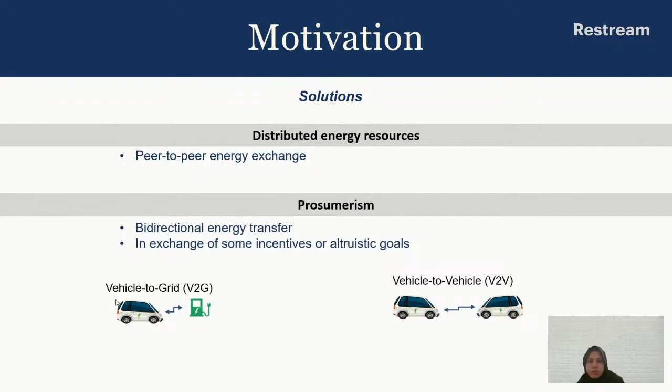In this work, and overall for utilizing prosumerism, we have many objectives. The first one is grid load reduction. So when electric vehicles help in energy supply, the electricity generation load on the main grid will reduce, and ultimately it will lead to cost reduction, because the grid has to pay some cost for electricity production.

And then we also aim to increase the utility of electric vehicles themselves, because they can buy energy during off-peak at cheaper prices, and they can buy energy from another electric vehicle, and maybe they have to travel less towards another electric vehicle rather than to a charging station. And then we achieve prosumerism.

That's being cooperative in the society, and by selling energy, prosumerism does not only lead to monetary profit, but also has some altruistic goals as well. Because when we sell energy, we will think that we are somehow contributing towards the environment, we are selling clean energy, and we are helping the community. And obviously environmental considerations are one of the objectives.

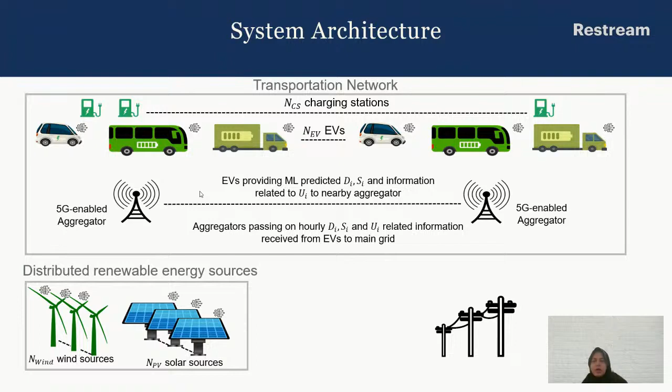And this transportation network is powered by distributed renewable energy resources. We have considered the wind resource and the solar resource. But obviously, this power is not enough to power the whole transportation network when we have a large number of electric vehicles. So the rest of the power is supplied by the main grid.

And we have some machine learning models incorporated in electric vehicles. They predict the demand and supply of vehicles. When a vehicle starts its journey, depending upon the route, it predicts how much energy will be consumed in its journey, and depending upon the energy consumed and the current state of charge, they decide whether they will need some energy on their way and where they will be stopping for charging.

Maybe they don't need any energy, they have enough in their battery, and they can complete their journey and still have some left, so they can sell their energy to electric vehicles. So all this information, whatever they predict, they send to 5G aggregators.

Here we are talking about a transportation network that is powered by 5G communications, and the vehicles can talk to the aggregator, and the aggregator then sends the information to the main grid. So basically, the aggregators send hourly predictions of demand and supply from the electric vehicles that it is anticipating, and the hourly prediction of supply from wind sources and solar sources is also sent to the main grid.

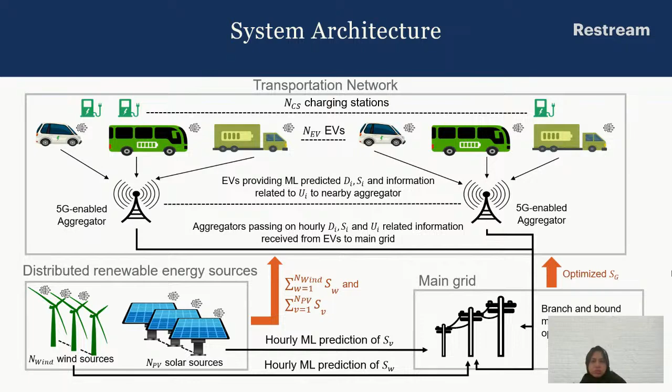Then the grid decides how much energy it needs to provide to the transportation network, depending upon how much it's getting from the distributed sources, and what's the demand and supply from electric vehicles. So it optimizes its cost. It tries to minimize its cost and optimize the supply. Here, we will see how the problem is formulated in the upcoming slides.

So first, we predicted the output from wind and solar resources. We have different data sets for wind and solar energy sources. Mainly, the parameters for predicting are weather related, like time of the day. Is it morning or afternoon or night? And day, maybe it's a winter month or a summer month. And then the other parameters like wind speed, wind direction, and precipitation, solar radiation, etc.

We used some machine learning models for prediction. They are open source models. Mainly, they are regression models like CatBoost, and then gradient boost, light gradient boost, and hybrid LSTM, that is long short-term memory and convolutional neural network. In the results section, I'll show how the performance of these models varies according to the training time and the accuracy.

For predicting energy demand and supply, we have used the same machine learning models, but before that, we performed some mathematics to see how much energy is consumed. So, depending upon the speed of the electric vehicle, its traction force is calculated. It depends on the speed, acceleration, the mass of the vehicle, and its frontal area. These parameters calculate the force that is required for moving the vehicle, and then what will be the energy consumed.

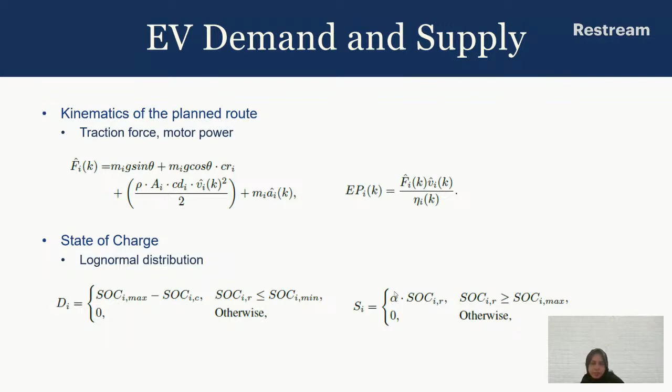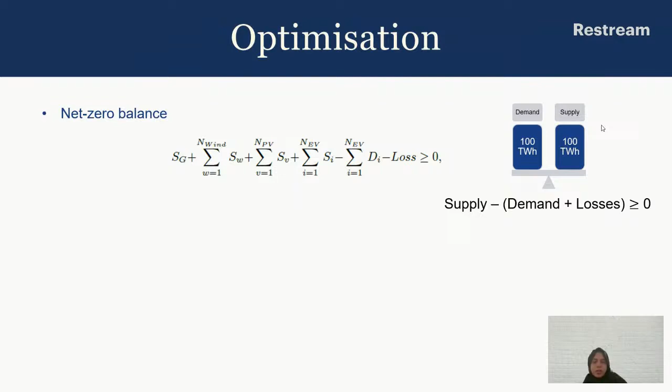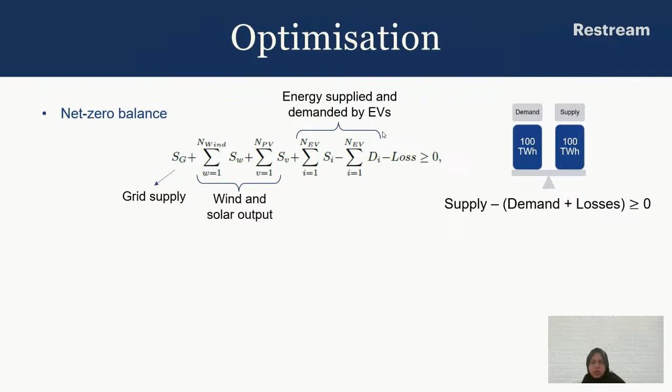Then we perform optimization. The main goal of our optimization is to achieve the net zero balance. Here, net zero balance means that we should have enough supply that caters to the demand of the transportation network, and the supply is coming from the grid and wind and solar sources, and some of it is coming from electric vehicles who are willing to give their energy, and the demand is coming from the electric vehicles. Based on that, we formulated a problem and then solved it using the mixed integer linear programming branch and bound method.

And in the problem, we aim to minimize the grid cost by optimizing the supply from the grid and the supply from electric vehicles. Like, it takes supply from electric vehicles and produces some of its own so as to achieve the minimum overall cost. Then we have some constraints, like there is an upper limit on how much a grid can produce, and if it is buying from electric vehicles, then we have to make sure that the electric vehicles' utility is greater than zero, so in the end it's earning some profit.

And also, last but not the least, the main concern is to achieve the demand supply balance in the transportation network. And we solved it using the branch and bound method.

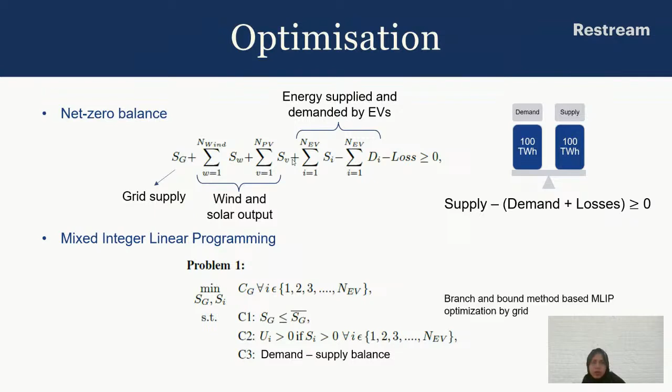Talking about the cost, I would like to first present the incentive distribution system that we have formulated for electric vehicles. So, when an electric vehicle is supplying some energy, and the grid is also supplying energy, the grid has to spend some cost in producing the energy that it's producing itself, and if it is producing from fossil fuels or maybe from any other resources, there's some amount of carbon dioxide that is emitted.

In fossil fuel, the amount is greater, but in other resources like solar energy and wind energy, there's a smaller amount that is being emitted. So, whatever amount is being emitted, depending upon its mass, it has to pay a penalty charge to regulation authorities. Then, if it is buying energy from electric vehicles, it will pay some price to the electric vehicles proportional to the supply that is being provided.

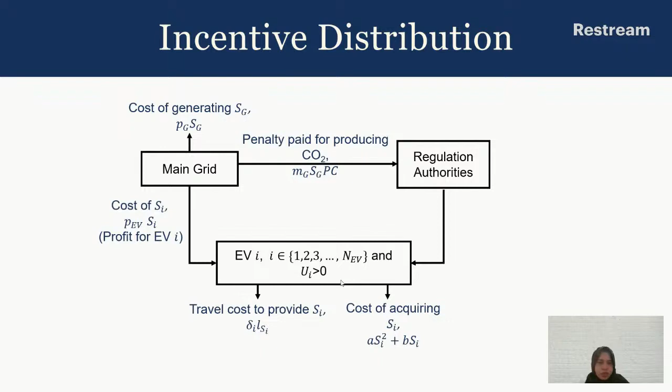Also, when it comes to electric vehicles, it earns some profit from the main grid and some profit from the regulation authorities. So we have proposed that regulation authorities should also give some profit to electric vehicles so as to encourage prosumerism. But also it had to pay some cost while acquiring the energy that it's giving away, and when it's moving towards a buyer or towards a grid or a charging station, it will be spending some energy, so there's the travel cost associated with the electric vehicles.

So that was our proposed system and incentive distribution. Now let's see the results. These are the results of the AI models that I discussed, that we used AI models to predict the solar output, the wind output, and the energy consumption from electric vehicles. So we compared four models: CatBoost, XGBoost, LGBM, which are available open source in Python, and the hybrid convolutional neural network and LSTM. Like it's the combination of regressive and neural network models.

So we see that in terms of training time, the CatBoost is giving the lowest training time, and the lowest training time is lowest computation. So when the computations are low, obviously it's energy efficient. Secondly, when we talk about its accuracy or the final test error it's giving, it's also low, or sometimes even if it's not low, it's at par with the lowest. Like it's quite considerable. So we used CatBoost in the rest of our results.

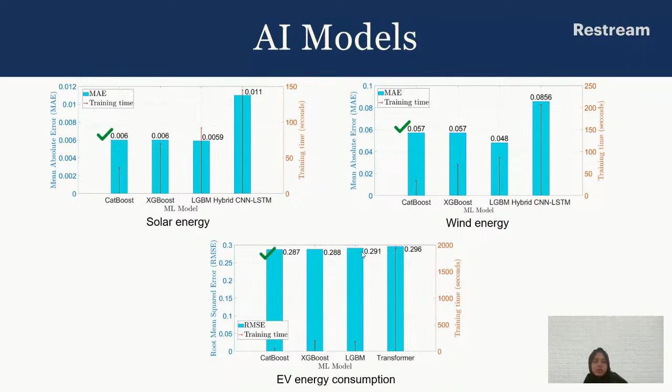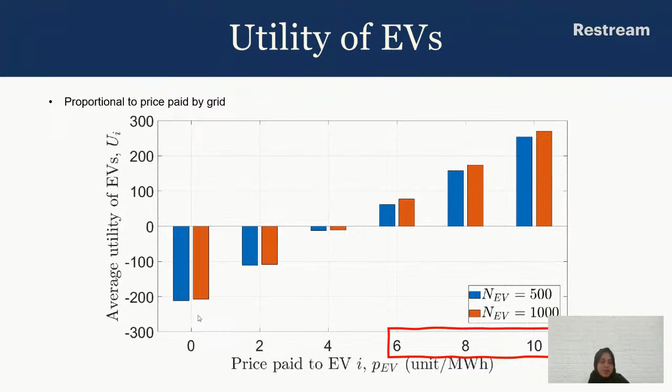Here, you see the utility of electric vehicles. So it depends upon the price that a grid is paying to electric vehicles for providing energy, and definitely the higher the price, the higher the utility will be. For some of the price, we see that the utility is either zero or negative, and in that case, the electric vehicle will opt not to share its energy if it's suffering from loss. So, depending upon the utility, we get the average number of sellers that are here to provide the energy.

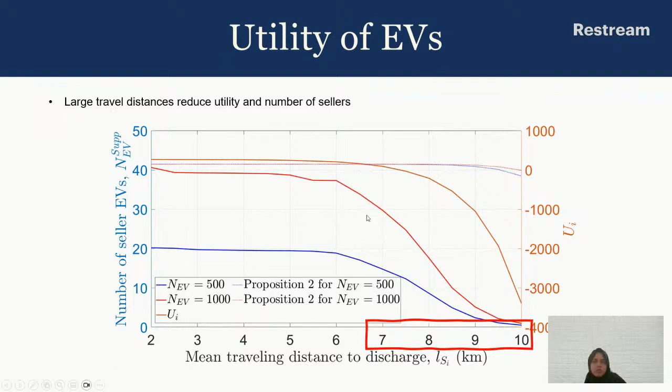And the utility does not only depend upon the price paid by grid, but also the traveling distance that it has to make to reach the buyer. So if the traveling distance is high, you see there's a drop in the utility, and this drop in utility will ultimately lead to the drop in number of suppliers.

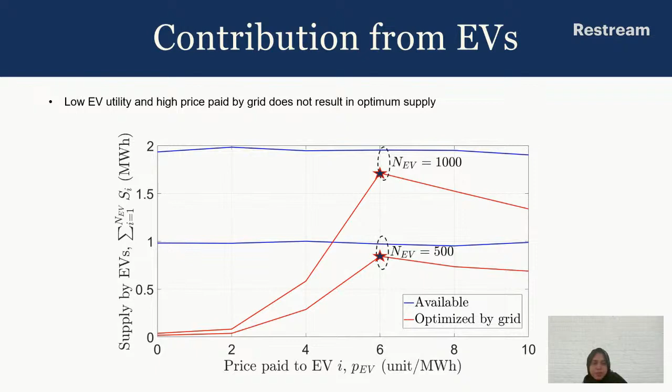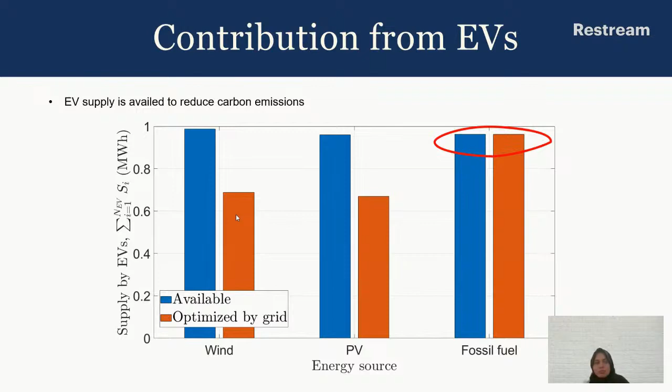Again, if we look from the perspective of the source of energy, we see that a grid tends to avail more from electric vehicles when it is producing from fossil fuels. This is because the grid has to pay some penalty charge for producing carbon emissions. So instead of paying a high penalty, it will try to avail the energy from electric vehicles.

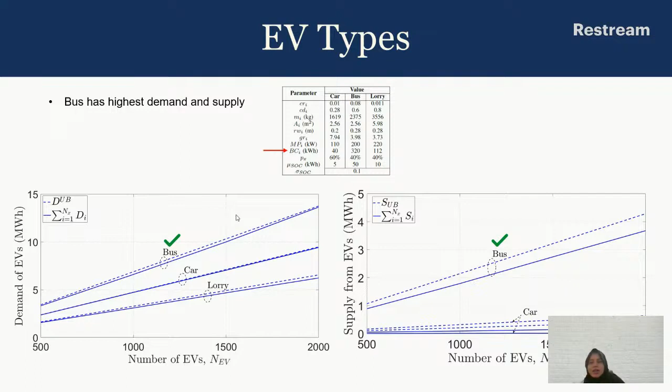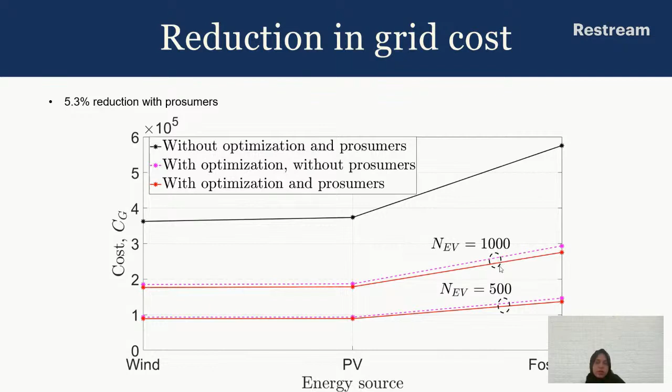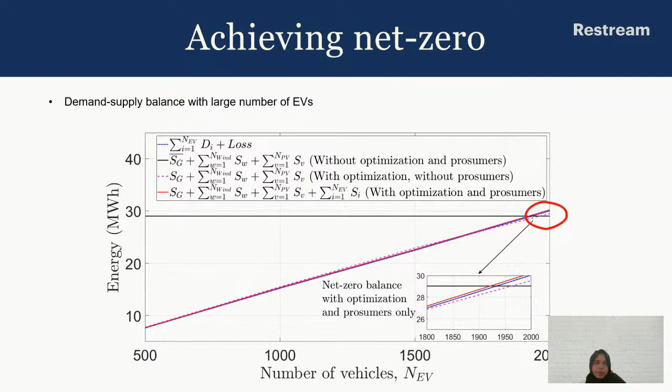However, if we are talking about optimization without prosumerism, there will be a time when the supply will not reach the demand, when the demand will be very high with very large number of electric vehicles. So that's why, to have the balance, we must need some help from the EVs. So yes, that's our result. That was our last result.

Now, I would like to conclude my presentation. Here, we have presented a smart energy management system orchestrated by 5G aggregator, because 5G communications plays a major role here for the early prediction of demand and supply, and only when the grid is continuously getting the prediction information through communication will the optimization be performed. And then we see in plots that the prosumerism, all the contribution from electric vehicles, depends upon a number of factors like the price it's getting in exchange of energy, or the distance it has to travel, and also the type of electric vehicle it is, either a bus, car, or a lorry.

So that was my presentation. Now I am ready for your questions. Thank you so much. Thank you, Ferheen. It was a pleasure to learn some new things. I mean, we look at the technology in a different way, but in terms of energy optimization, that is another way of looking at it, and I think it makes a lot of sense.

So, we have a couple of questions, and before taking that, I would like to clarify for myself. We are talking about energy management systems. So who is going to be the manager? Is it the mobile network operators? Is it the service operators or service providers? So who can potentially be the manager for these management systems?